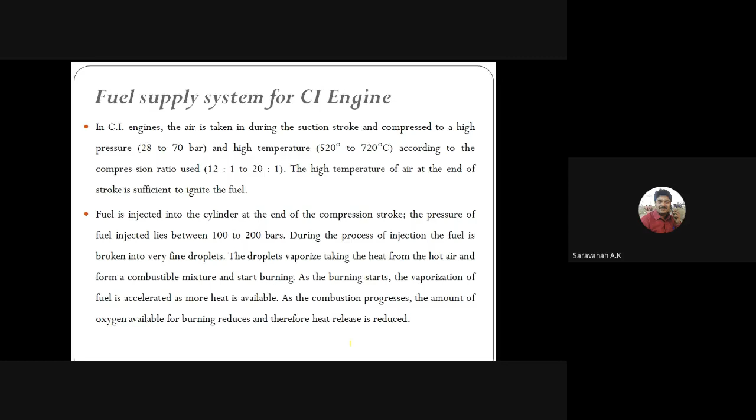So the fuel supply system for the CI engines, right? In the SI engine, we have to mix the air and fuel before entering the cylinder. So we are using the device, the carburetor, right? But in CI engines, the intake is only the air. So here we don't require any ignition system, right?

In the CI engines, only the air is taken into the cylinder during the suction stroke, and it is compressed to a high pressure, right? So here you can see the pressure ranges will be 28 to 70 bar, right? And it will generate a high temperature, that is 520 degrees Celsius to 720 degrees, right?

So here in the CI engine, the diesel engine, the compression ratio is high. The compression ratio will be 12:1 to 20:1, right? Due to this high temperature, this temperature is enough to ignite the fuel supplied from the fuel injector, right? So then we can see what the fuel injector is and how it works.

So the fuel is injected into the cylinder at the end of the compression stroke. The fuel will be sprayed at a particular pressure; the pressure ranges will be 100 bar to 200 bar, right? Through the fuel injector, it will be sprayed at 100 to 200 bar. During this process of injection, the fuel is broken into very small fine droplets, right?

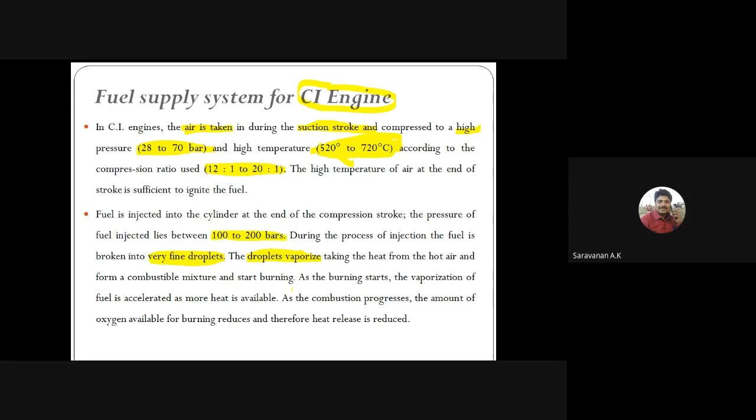To burn the fuel. So the burning reduces, right? So the burning will be reduced, and therefore the heat released is also reduced, right?

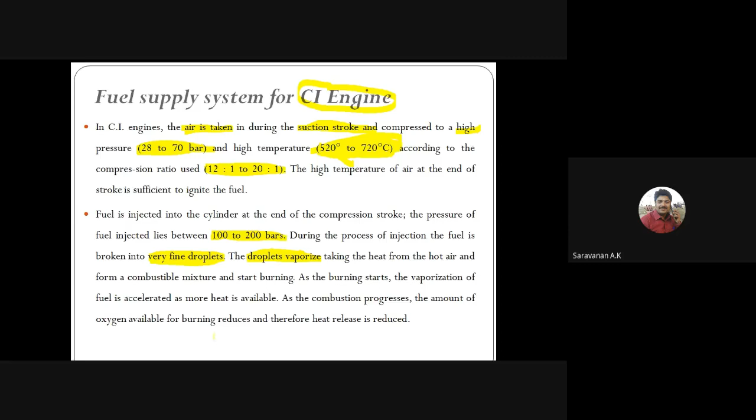Then, in the SI engine, we noted what the ignition lag is. Anyone? What is ignition lag? Ignition lag in SI engines. Anyone? Selva Vinayagam, what is ignition lag? Sir, fuel flow is low, sir.

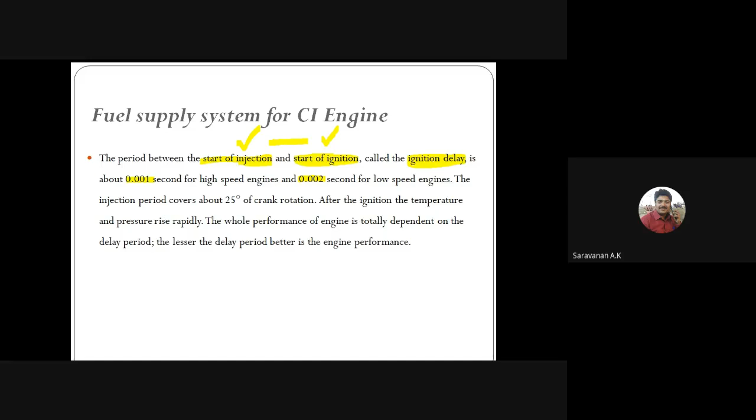So the fuel injector will press the fuel. So between the start of the injection and the start of the ignition, the time gap between these two is called the ignition delay, right? For high speed engines it will be 0.001 second. For low speed engines it will be 0.002 seconds. And the ignition delay corresponds to some crank rotation also, about 25 degrees of crank rotation, right?

So it's one of the important two mark questions: what is the ignition delay? The period between the start of the injection and the start of the ignition, the time gap between these two, is called the ignition delay. The ignition delay affects the engine performance in a direct manner. If the ignition delay is somewhat less, the engine performance will be good.

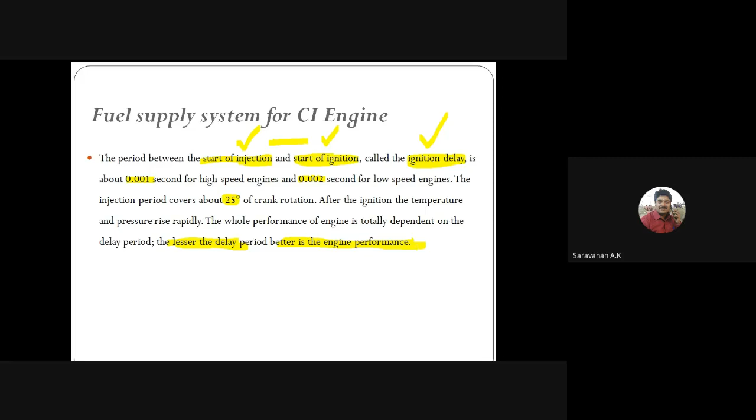So a lesser ignition delay period gives better engine performance, right? The lesser ignition delay period directly affects the engine performance, so it will give good engine performance. Then the requirements: what are the major or important requirements in the injection system, right?

So here the injection system is a very important one, right? Why? Because we have to supply the fuel through the injector. So the amount of fuel injected is very important. So accurate metering is very important for the injection system, right?

So why? Because in the carburetor, in the SI, that is the petrol engine, the amount of fuel supplied depends upon the throttle, the working condition and other criteria, right? So the fuel will be mixed with the air in a carburetor. That process is called carburetion, right? But here,

for every cycle we have to inject a very small amount of fuel through the injector, right? So the amount of fuel injected has to be measured in a proper manner. So that is a very critical one, right?

That is a very critical one. See, it's a very critical one, right? Why? Because we have to measure a very small quantity of the fuel that will be injected, right? So that has to be a very accurate one. So the accurate metering is very important, right?

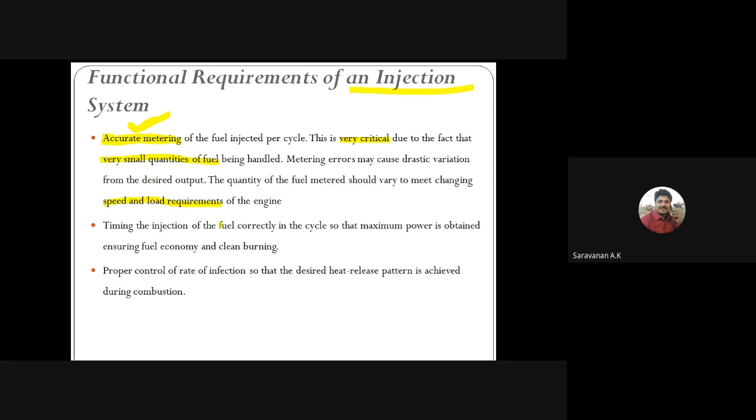Then the second one is the timing of the injection, right? When we have to spray the fuel. So at the end of the compression stroke, we have to supply the fuel. So the timing of the injection is very important. If the timing is missed, surely it will get some abnormal burning, right? So for clean burning and for fuel economy, the timing of the injection is very important, right?

Timing of the injection is very important, and the proper control of the rate of the injection, right? Same as the first point, so the metering is very important. So the proper control of the fuel that will be injected is very important. And here we have some pattern of the sprays, right? How the pattern will be there for burning, that we have to see.

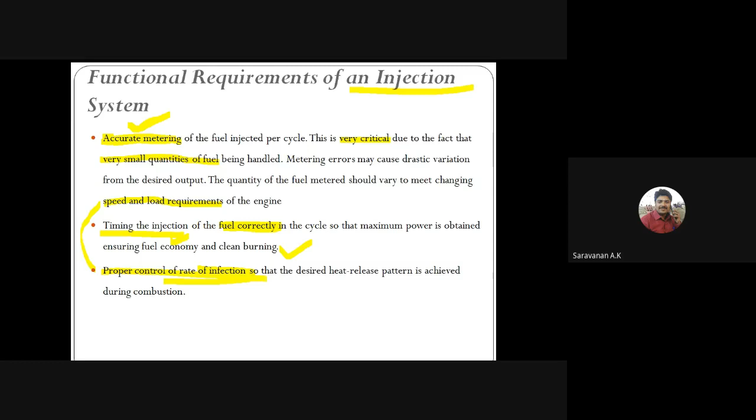Then the proper atomization, right? What is atomization here? The proper atomization of the fuel is very important. Why? Because the fuel will be injected in small fine droplets, and those fine droplets get vaporized. So we have to create a fine droplet of fuel that will be injected through the injector. That process is called atomization. That's also an important one.

Then the spray pattern, right? The spray pattern is very important. Why? Because the spray pattern will affect the burning. If the spray pattern is good, we can get normal burning; otherwise we can get abnormal burning. So we have to ensure that the spray pattern is good for the rapid mixing of the fuel and air in the cylinder of the engine.

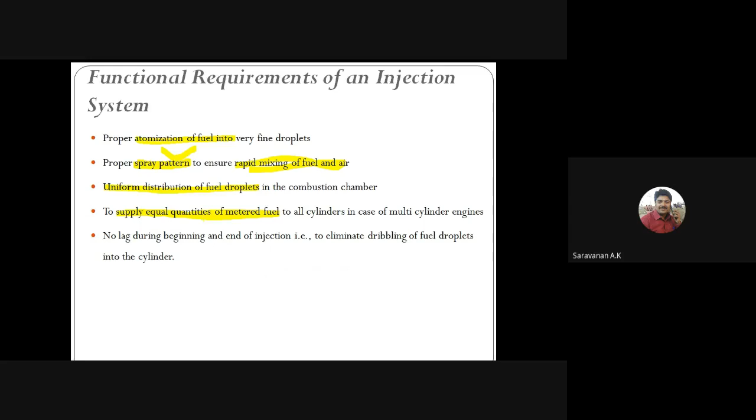Then the uniform distribution of the fuel droplets, right? Whether the fuel droplets are uniformly distributed or not in the combustion chamber, that we have to see. Then the supply of an equal quantity of metered fuel. That's the same as the first point, so accurate metering is required. For multi-cylinder engines, whether the same amount of fuel is injected in all the cylinders or not, that we have to see.

Then, as I already told, the ignition delay. If the ignition delay is lesser, the engine performance will be good. So we have to see the lag: no lag during the beginning and the end of the injection. At the start and the end of the injection, we have to eliminate dribbling of the fuel droplets. What is dribbling? Anyone? Dribbling.

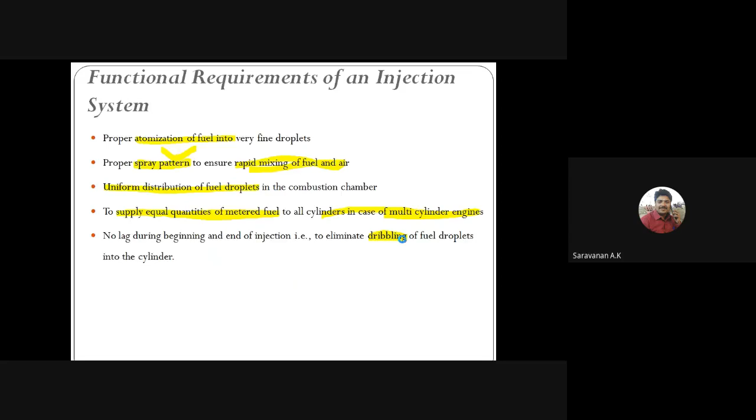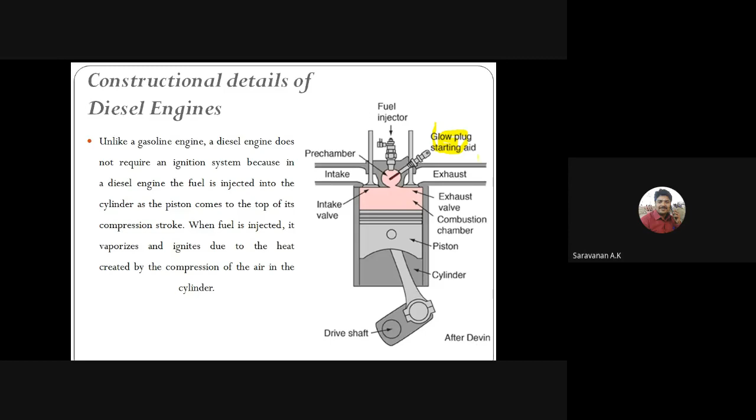So in this diagram you can see, here we add a glow plug. For the air injection system, we are using the glow plug. Without the glow plug also the injection system will be there. The fuel injector supplies the fuel directly to the pre-chamber and the combustion chamber without this aid. This type of system is called solid injection.

So if we are using the glow plug, it is called the air injection system. The supplied fuel will be compressed well by using the air supplied through the glow plug. So these are the two systems: one is the air injection system and one more is the solid injection system. These are the differences. Here we are not using any starting aid.

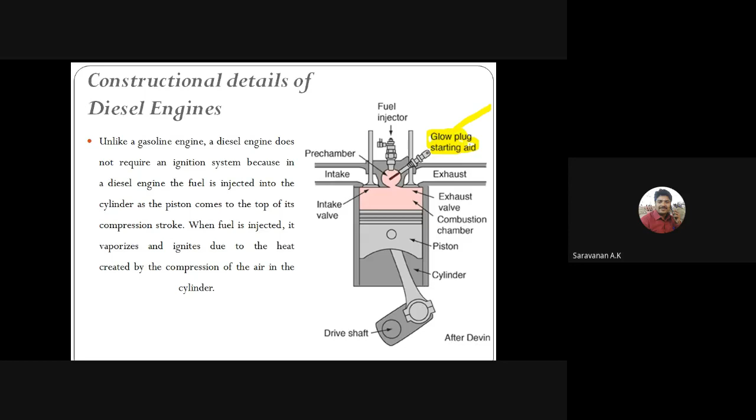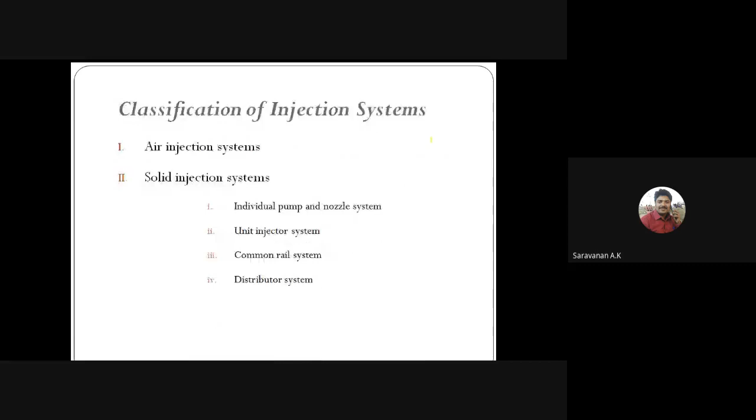In the solid injection system we have again four sub-classifications: individual pump and nozzle system, the unit injector system, common rail system, and the distributor system. Before going to see this classification, we can see what is the fuel feed system, how the fuel feed will be there and what components are there.